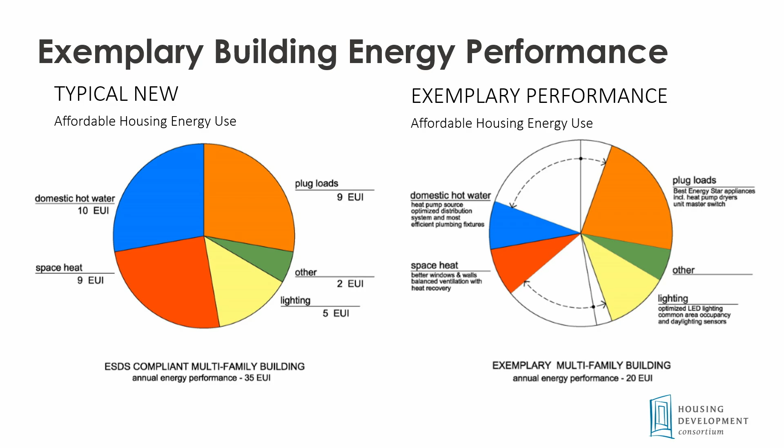We envisioned what these specifications would do for the performance of buildings, trying to reduce key areas and, across the board as much as possible, improve the performance of these buildings by instituting new efficient technologies, better design practices, and construction practices, and demonstrate that in new construction buildings.

To build this out, we identified a couple of key focus areas and worked as a group to collaborate, to charrette out the right balance of performance specifications in these various areas—ranging, first and foremost, from identifying that early integrative design is key to the success of incorporating these strategies. So talking about it early with your design team, your contractor, your owner, identifying the priorities, finding the right balance, and working together to make sure those requirements are built in.

But then more technical aspects: exterior wall assemblies, focusing on newer technologies coming through the codes and other areas, balanced ventilation with heat recovery. This has only in the last 5 years become standard in our new construction, but when we started this project, it was not—there were very few examples of new developments that incorporated that. So we felt this was an area we needed to build out more information and guidelines.

Water heating is another one. When we started, using heat pumps for water heating was not commonplace yet, so another great area for focus. We also focused on solar and on how to find the right healthy materials to incorporate into our buildings.

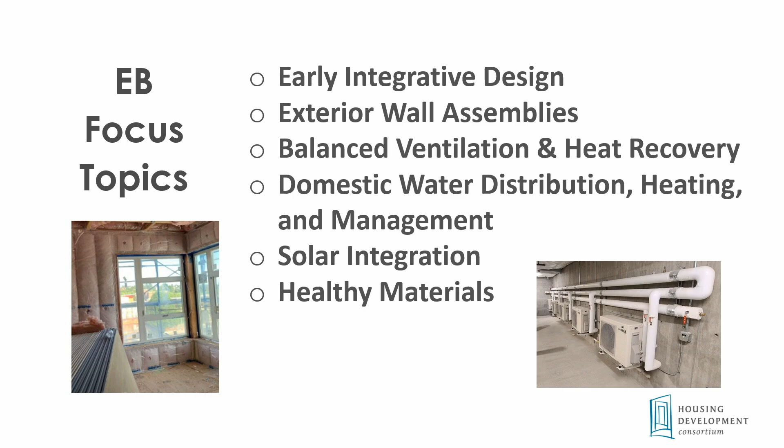So in all these subject areas, we drafted some straw specs that everybody coalesced around, really worked through them all to add more detail and find the right balance through the charrettes. We had workshops to distill that down to what we felt was the right balance, and built out technical resources and guideline documents to provide owners and engineers information on how to incorporate these new technologies into buildings.

All this exists on the HDC website, and everything we're doing, particularly in these demonstration projects, is to implement it, learn from it, and feed back to determine the right balance on these specifications in terms of costs and return on investment. Maintenance and operations is a huge consideration - what are we learning about maintaining these new systems? So over time we'll be updating our specifications as we go and trying to share those out.

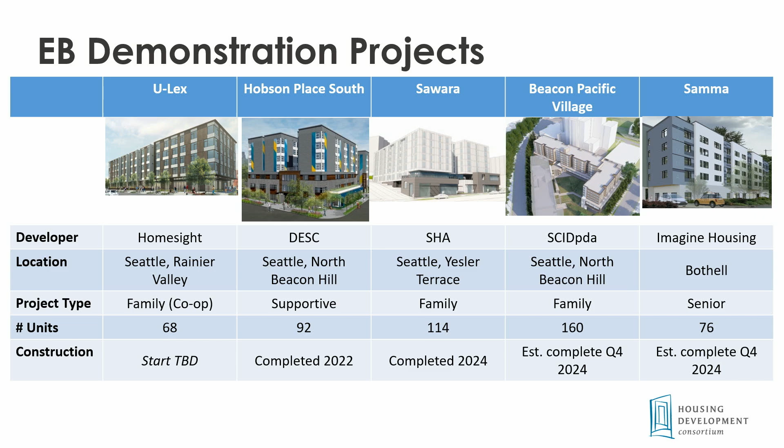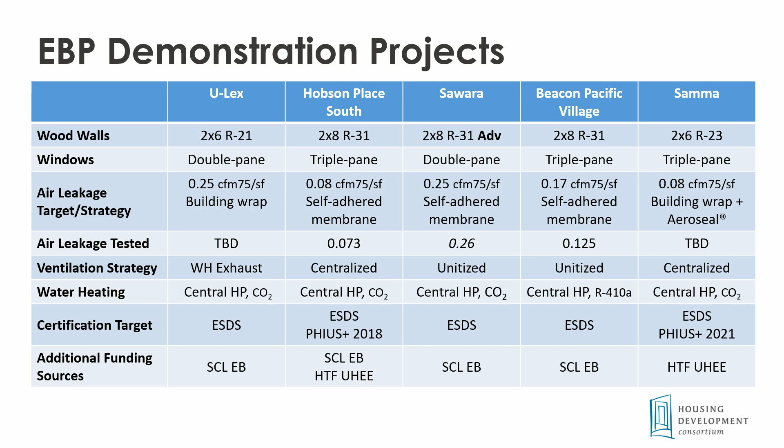So I'm going to talk about the 5 demonstration projects that were part of the Exemplary Buildings program. It's a pretty interesting cross-section of different building types, from cooperative home ownership to permanent supportive housing. 2 of them are completed, and 2 more will be completed this year. Joel will be talking about Beacon Pacific Village. We've been following these projects, and a lot of them have taken different strategies, not necessarily incorporating everything we recommended, but identifying pieces of it - in one example, Hobson Place and Samma pursuing Passive House certification, so ultra high performance. None of them are the same, but they're all sharing their knowledge, all committed to integrative design, and we're learning a lot from them.

I'm going to drill in a little bit on Hobson Place because it's the project that was finished first in the cohort. It's an amazing project - 85 or 90 units of permanent supportive housing above a clinic in South Seattle, developed by DESC, and a great team that came together in the middle of design to adopt these new standards and adjust, because there were some additional incentives available to pursue Passive House certification and exemplary buildings.

You can see to the far right, Hobson Place North, which is a building built first to code and DESC spec, which is beyond code, but that was built first. Then this project came on and pursued Passive House and exemplary buildings. Instead of just taking the design from north and redoing it on the south, it was a completely new process, a new design, and it really pushed everybody to work together to figure out how to get it done. This picture really exemplifies the changes that were made and how much work it took to adopt some of the strategies.

On the right side, you can see DESC had already incorporated balanced ventilation with heat recovery into their projects for a couple buildings. But one of the things that was standard practice was putting all the ductwork out on the roof. There's a lot of ductwork in these systems, but that doesn't work for passive house, I can tell you - you have to bring all that ductwork within the building envelope for performance reasons. When you do that, it's amazing how much room you free up for solar in this particular project, and just how clean the roof is and how much solar could be supported because of that change and the efficiency we're seeing from the higher performance systems.

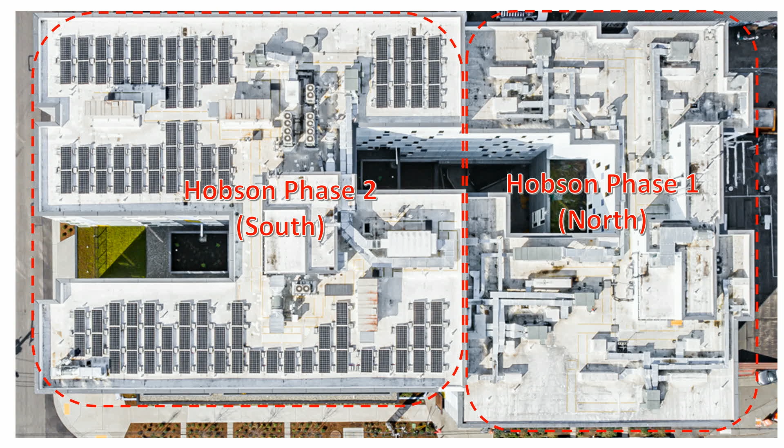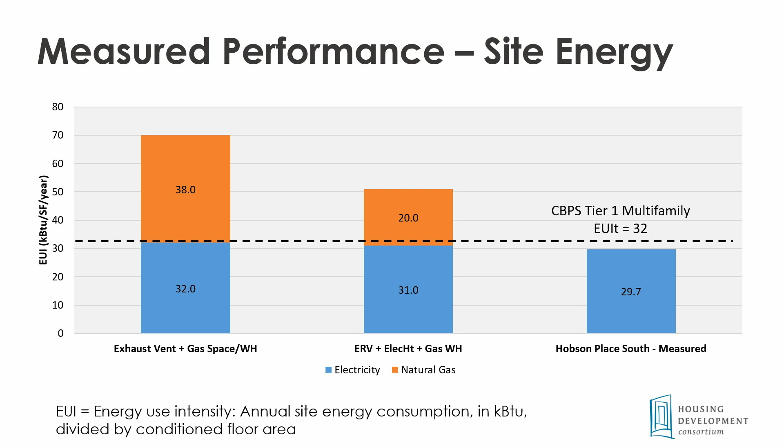So this is data that really demonstrates the step changes in what can be done when you pursue these strategies. The first column was the typical design for permanent supportive housing 10 years ago, building to code, using natural gas for water heating and space heating. Then moving to balanced ventilation with heat recovery, but still using gas for water heating, and finally Hobson Place. So a real clear step change in performance - this is in terms of site energy use, and how it corresponds to some of the existing clean buildings targets out there. There's not a target for multifamily yet, but the one some people have talked about because of the early adopter program - it exceeds that target. And when you look at emissions, site-based operational emissions, it's an incredible step change.

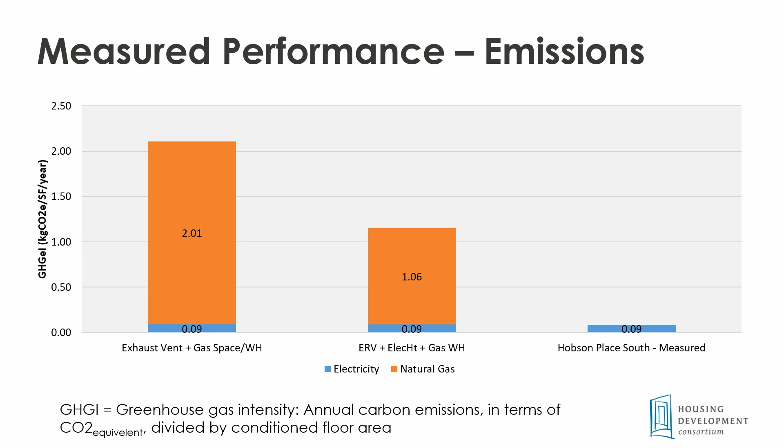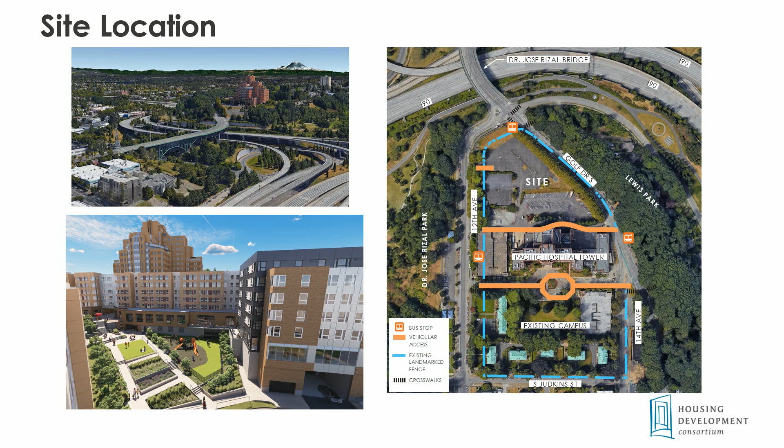You can see it upper left, down here is the site. There used to be a surface parking lot. This is building A, a 160-unit family project, shown on the right. The blue area to the right will be our building B, our second building in the next few years once the funders give us money.

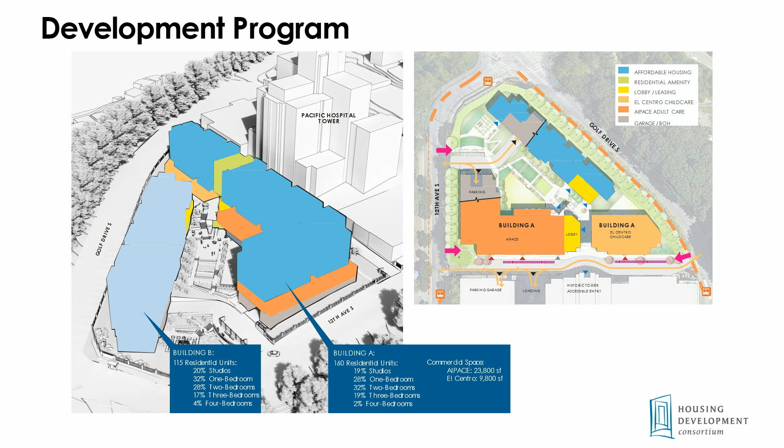One thing we mentioned to the funders is we have very clear data in the 90th percentile for pollution, displacement, education, and even diversity. When we laid it out, with the nexus of I-5 and I-90 and the flight path, there's plenty of data showing that for any project next to freeways, the level of pollution is very high.

I could hear them nodding their heads over the phone, and they said, okay, it starts to make sense. At that point we went all in and said, okay, we're going to do this. It makes a lot of sense, we want to move forward with it. So again, noise pollution, environmental exposure, and some of the effects.

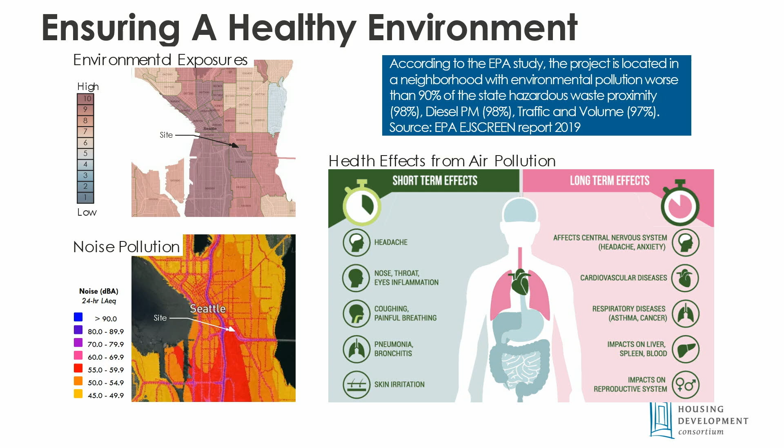So again, some of the data I mentioned: 3 and 4 bedroom units, in a neighborhood where pollution is worse than 90% of the state, with hazardous waste materials at 98%, and diesel traffic and volume at 97%.

Some of the standards we put in our project: EUIs less than 20, 40% better than the 2015 baseline. We have central electric water heaters, and individual unit ERVs, energy recovery ventilators — the first time I had ever heard of them, but they're becoming more commonplace now.

Triple glaze windows — when we give tours of the project, we open and close the windows to show they're triple pane and glazed, and it's very quiet. And then we have solar panels on the roof.

As for the cost premium, everyone asks how much more it was. Our baseline construction cost was just a shade under $70 million, and roughly about $1.5 million was the estimate for the premium from these added features.

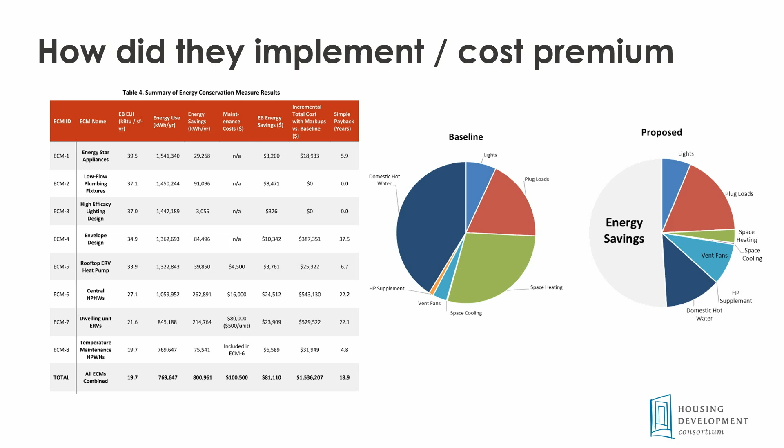So some of the key takeaways — I have to thank David for putting this slide together — the first is definitely the early commitments. Our team, including our architect Weber Thompson, really bought in. Since we didn't have the specs early on, they had to pivot on a lot of their design, and they were more than willing to do this, really understanding the importance of it.

So we really dug in and worked hard, because you just don't add these features. The ERVs were a bit of a challenge — working with the contractor MARPAC, we really had to redesign some of the features already designed into our units.

Once the project's running, the important thing is to start measuring and to really have ownership and management involved. When I say management, I mean property managers or third parties—they're going to follow what the owner wants. So it's really about who's managing this on a day-to-day basis.

We also need to account for the benefits to tenants. As we started pre-leasing, I mentioned to the property management team: let's put the exemplary building standards on the front page. We just talked about the normal things, but if we talk about the benefits to your family and your kids, it just makes sense. Why hide it on the second page where it can get lost? Even if it just swings the opinion of a small percentage, you start educating people and the information starts getting out there. So we want to put this on the front page, demonstrating what this means, maybe with an asterisk linking to another page with more detail for those interested.

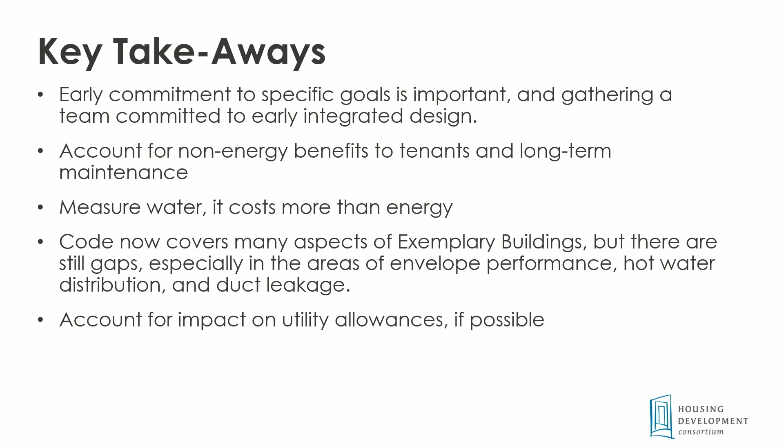So I think that's it. So, Kimberly.

Hey everyone, is everyone still awake? I know it's that mid-afternoon time, we're still digesting. But I'm very happy to be here and speak with you and be with this amazing panel.

We're going to transition a little bit. First, to state my name—I'm Kimberly Lowen. I work at Elevate, a nonprofit that works at the nexus of affordable housing, climate resiliency, and equity, specifically focusing on retrofitting multifamily affordable buildings.

So we're going to switch a little bit to talk about decarbonization. We heard a lot, mostly from Joel, about the intersectionality of housing, climate, and equity. And it started off with saying we need 1 million more homes in Washington—we need new construction that's good, sustainable, and equitable. But we also need to look at our existing housing and make sure those in existing affordable housing have good, healthy conditions to live in. So I think we need to hold both of those things as we look at solving this housing crisis, while also moving forward with the climate and equity components.

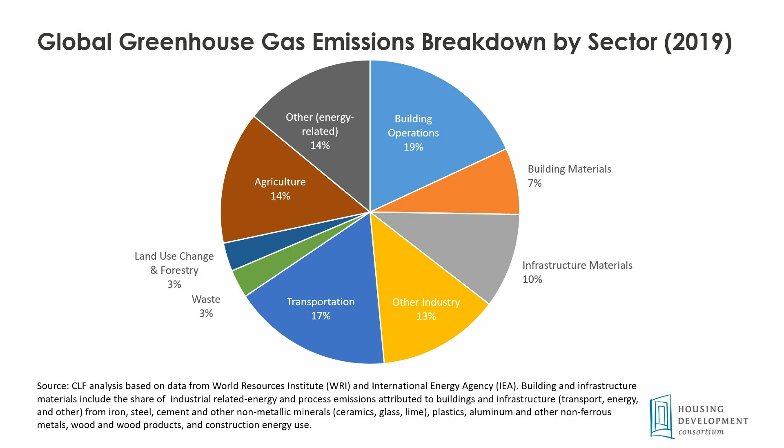So I'm going to transition to talk about decarbonization in existing buildings. I want to ground ourselves in what the climate impacts of our built environment are, specifically buildings. This is data from 2019, and it's global, but it's actually pretty representative of at least the Puget Sound region—I'm not sure about the rest of Washington state—but generally about 40% of emissions come from buildings. So it's a really impactful place where we can address climate impacts and emissions. Mostly we're looking at operating costs of buildings when we talk about that 40%, so we can really make an impact on reducing emissions by addressing those operating costs.

So I want to take a minute to talk about what we mean by decarbonization, specifically in existing buildings. Really, this is about three pillars that we look at, at least within the work that Elevate does.

Those 3 pillars are energy efficiency, making sure the building is as efficient as possible with envelope and performance, and looking at electrification. You saw those slides from David on the reduction - we went to an all-electric building and emissions reduced drastically. So from efficiency, to electrification, to renewables - looking at all 3 pillars to decarbonize the building and reduce emissions as much as possible.

Some buildings may need all 3 of those components, some may need 1 or pieces of it. But really, how can we look at all 3 of these pillars and work on the decarbonization of our buildings?

I also want to highlight, Joel touched on this too, the additional benefits we get from decarbonization - not just from an emissions standpoint. In the lower left-hand corner, we're looking at promoting healthy housing. Health conditions are really improved within the building for tenants and residents. We can reduce energy burdens and utility costs for people, looking at how we reduce our cost of living while improving quality of life. This is one way to do it.

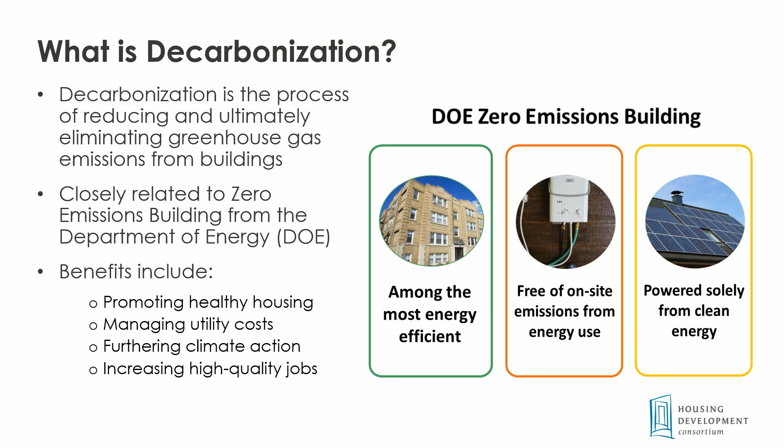Further, in climate actions, this also creates good high-paying jobs, looking at how we can build out the workforce of the clean energy economy and create more jobs within this space. So a lot of added benefits to decarbonization.

So as we know, we want to do this work, we need to do this work, to look at this nexus of how we can address housing, climate, and equity all together. As we talked about, there are some new building performance standards - Seattle just passed their Seattle building emissions performance standard, and we also have Washington's new clean buildings code. So we're going to be working on seeing how we can implement this.

This is now a really important need for existing buildings and housing providers, because they are going to be required to meet, at least within Seattle, net zero by 2050 for their buildings that are over 20,000 square feet.

Patience talked about this in the beginning, but housing providers - we are all stretched. There's a lot of different competing priorities, a lot going on. So how can we best support building owners and housing providers in meeting this new requirement they're going to have to meet, but also addressing the climate and at the same time improving housing conditions for tenants? How can we come together and continue this collaboration that's been going on with the exemplary buildings program and new construction, and now bring this to existing buildings and help meet these new building performance standards?

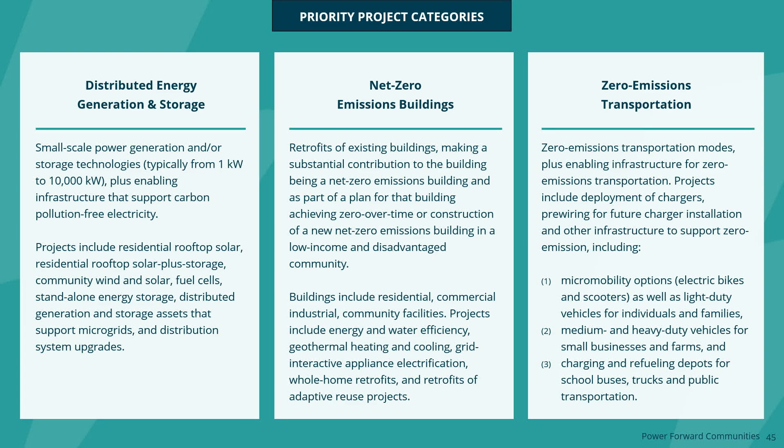So then there's all these different priority categories. We're going to focus on net zero emissions buildings. The DOE has come up with a new definition, a standard we can all agree on for what net zero emissions is: highly efficient, electric only, clean power. Thank you for going through some of those before, so I didn't have to do it as much.

And then another note around the federal requirements. There's a lot of hefty federal requirements for getting this money. Chief among them is the Build America, Buy America Act, which... basically the government's working on more and more definitions and help understanding what those are, and they'll be coming out with more information about that over time.

But essentially the idea with all of these requirements that you should take home is that a project that may have already been required to use some of these is a better project to access greenhouse gas reduction funding than a project that otherwise wouldn't have needed Davis-Bacon, wouldn't have needed Historic Preservation Act, working with those, right? So if your project was otherwise easygoing without any of these, don't try to go for GGRF money because it'll just make things more complicated, right? So if you're already subject to some of these, then it might be a good idea.

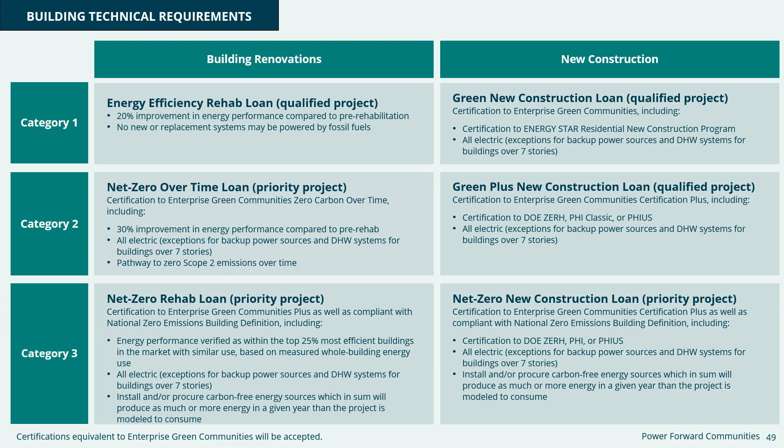Okay, so I think I said good news, bad news. I think a lot of people thought IRA funds would fill all the holes in all the projects. It is not. It's really important that we temper expectations around how much money is going to be available for everyone's projects. Yes, this is a wonderful opportunity to finally fund all of these important decarbonization efforts that we are putting forward, and I think honestly us in the Pacific Northwest have been leading the way in doing a lot of this work. But it is not necessarily going to solve the problems of bigger gaps in projects that don't work otherwise financially. So, reality check.

And then if you are already working on decarbonization ideas for your projects, Enterprise is working with RMI and HPN, Housing Partnership Network, and formerly Rocky Mountain Institute, now just RMI. We put together an affordable housing decarbonization hub. One of the key components of what we're planning to do at Enterprise is a lot of technical assistance, helping folks understand all the different opportunities for funding and how you might layer them. So there will be publicly available web tools.